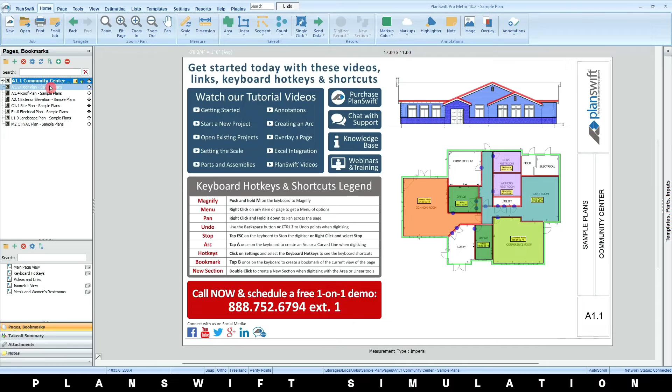In this video, we will be demonstrating the basics of PlanSwift, from creating a job, digitizing a takeoff, exporting takeoff data to Excel, and other basic tools and functions of this software. Let's begin. So this is the window that you'll see once you open PlanSwift version 10 or higher. As you can see, there are already sample plans that the developers have present for the users to experiment on. But for now, we'll neglect all of these.

Let us first explore the different parts or sections of PlanSwift. These options found on the topmost part are called tabs. The Home, Page, Tools and View tabs are different toolbars associated with plan viewing and takeoff. The Estimating tab is where you can view your takeoff summary in details. List, templates, and settings are where you can configure PlanSwift and set up reusable objects such as assemblies, lists, and others.

Reports. Well, that's pretty straightforward. You can run several built-in reports and export or print them. The Help tab provides you a wealth of resources for you to get started. And lastly, plugins allow you to add optional features and functionality to PlanSwift. Most of this video will only focus on the functions found in the Home tab. This set of functions or options located on top is called the ribbon bar menu.

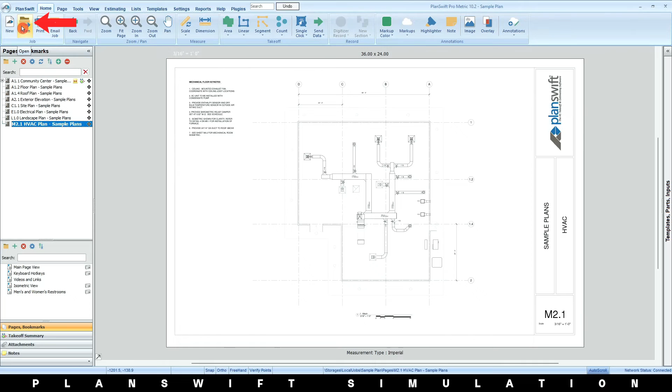Now, let's start digitizing. The Open button opens the Open Job window, which contains all of the existing jobs or takeoffs located on your device. There are 2 existing jobs here present by the PlanSwift developers. However, digitizing always starts with creating a new job. To do so, click on the New button to start a new job. Once clicked, the New Job window will appear.

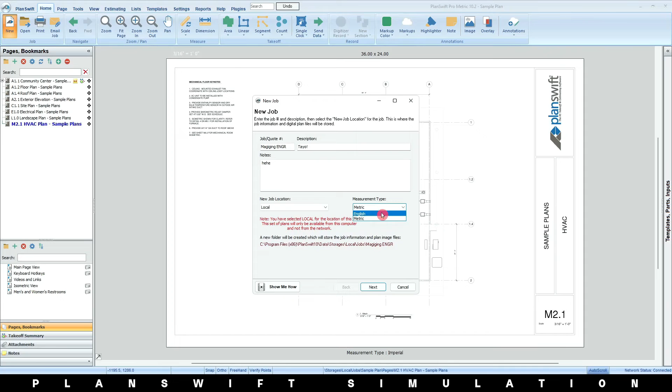This window allows us to name and describe the job, add any notes, and specify whether the measurements are to be in English or in metric. It's all a matter of preference with the names and descriptions. But for the measurements, we'll of course go with metric. Then click Next. This will now prompt us to browse and select the files we want to digitize. As you may recall from our presentation, PlanSwift supports all major digital file formats. Let me select the files that we digitized last semester in our quantity surveying course. Once the files are selected, click Next.

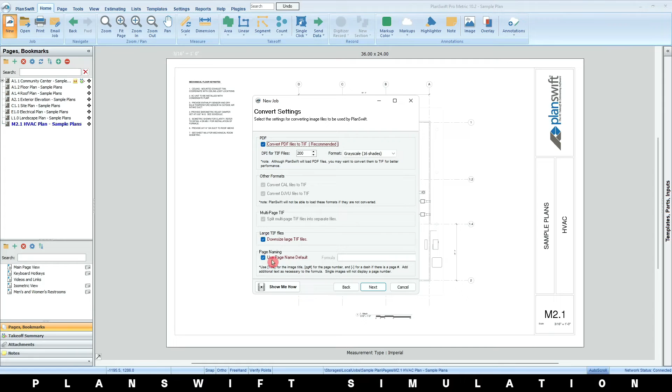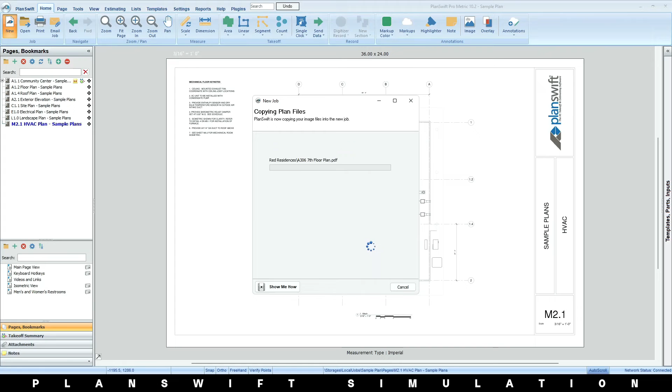If you miss selecting some files, don't worry, you can always add them later on. This window will pop up, allowing you to set up conversion settings or page naming needs if you have any. But for now, we'll just proceed and click Next. PlanSwift now tells us that we are now ready to create our new job. Click Finish. Now we wait for all the files to be imported. After the import is complete, the job is now created.

Notice that the plans I have imported are displayed incorrectly, as I have to rotate them 180 degrees. If you need to rotate your pages, first select the pages you want to rotate here in the left window. Then click on the Page tab and click on Batch Rotate Pages. Click Selected Pages, rotate 180 and click Start. Your pages are now rotated as per your preference.

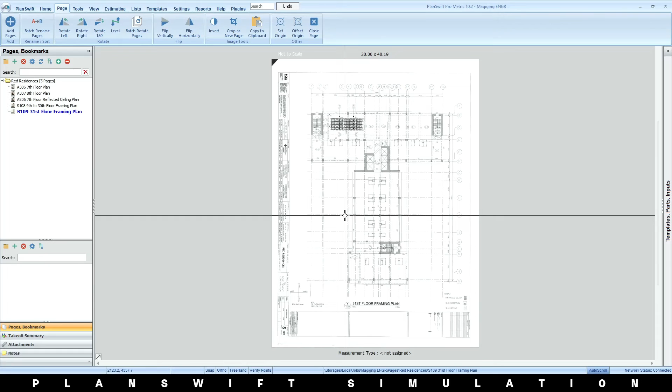Mr. Panganiban, please take the floor.

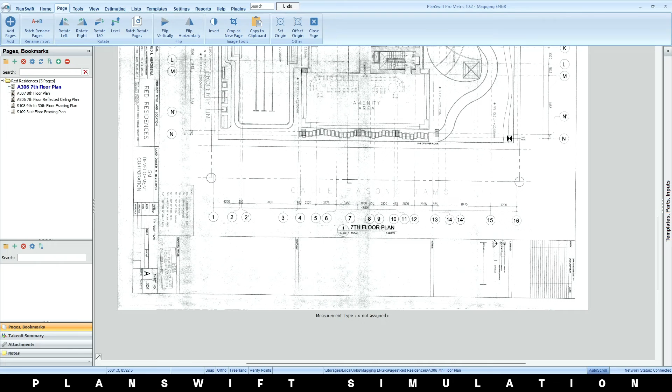Thank you, Ms. Peralta. So the next thing to do here is to scale the pages. If you may recall from our discussion, there are 2 types of scaling, manual and automatic. PlanSwift must know the correct scale for your plans, otherwise it will not allow you to start a takeoff. So most plans will come with a scale like this plan, which is 1:100 meters, and this is where the automatic scaling may come in handy.

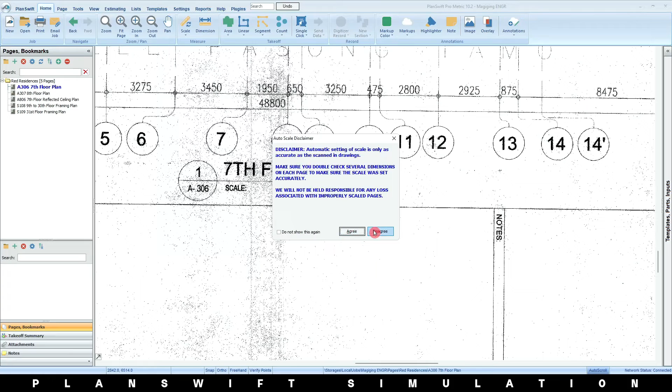So to automatically scale your plan, go to the Home tab, click on the drop-down half of the Scale button, and select from the list the scale that is indicated in your plan. So in this case, it is 1:100 meters. This window will then pop up asking for confirmation. If you click Agree, your plan will be automatically scaled according to what you have selected. However, I will click Disagree because I would rather use manual scaling, and I will explain why.

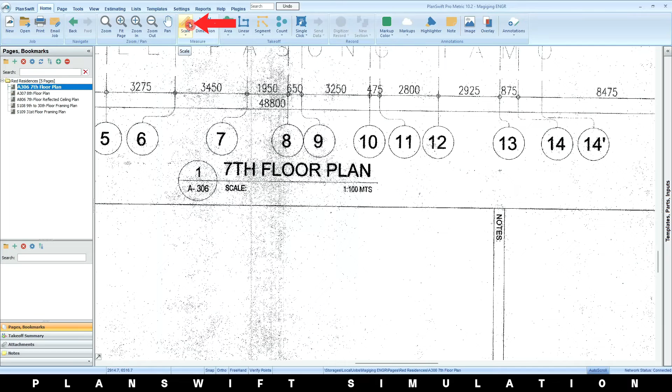It is recommended to use manual scaling for plans or files that are not directly exported from AutoCAD or any CAD software, like this plan that we have here on the screen, which is only a scanned copy of the original plans. To manually scale your plan, click on the Scale button, or you can also click on the drop-down half and select Standard. This window will pop up and you should input here a known dimension from the plan. It is recommended to input here the longest dimension.

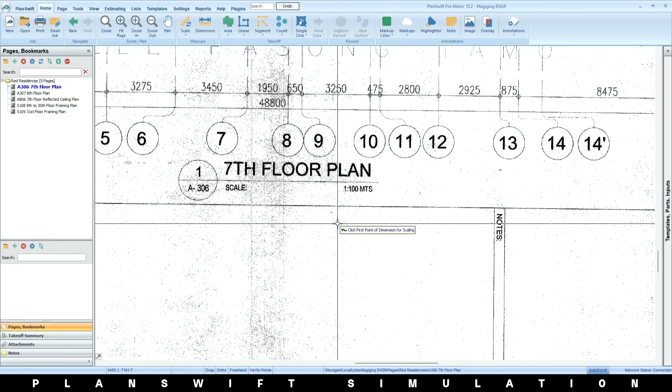In this case, I will input this 48,800 millimeters or 48.8 meters dimension. Click OK. Next, you should click 2 points on the plan that indicates the 48.8 meters. You can hold the M key on your keyboard to magnify the page, just like that, and you can hold on your middle mouse button to pan the page. So the 48.8 meters starts from this point all the way to this point. Now your plan is horizontally scaled.

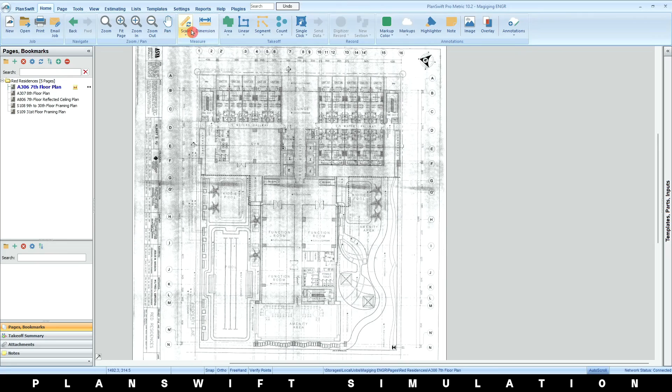Do the same thing to scale your plan vertically. So click on Scale, input the longest vertical dimension, which is 59.975, OK, and click on the 2 points that indicate the 59.975 dimension. Your plan is now vertically scaled. You'll know that your plan is horizontally and vertically scaled when you see this little plus icon with arrowhead beside the name of the page in the Pages Bookmarks window.

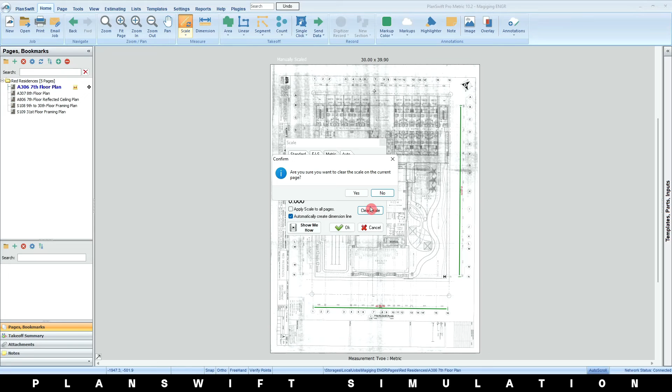If you make a mistake on your scale and you want to remove it, click on the Scale button, click Clear Scale, and click Yes. Next, you have to level the pages. The plans here I have on the screen are not leveled correctly because they are just scan copies of the original plans. If I try to draw a straight horizontal line here using the Dimension tool, you'll notice that it does not match the horizontal line on the plan, which means that the plan is slightly rotated.

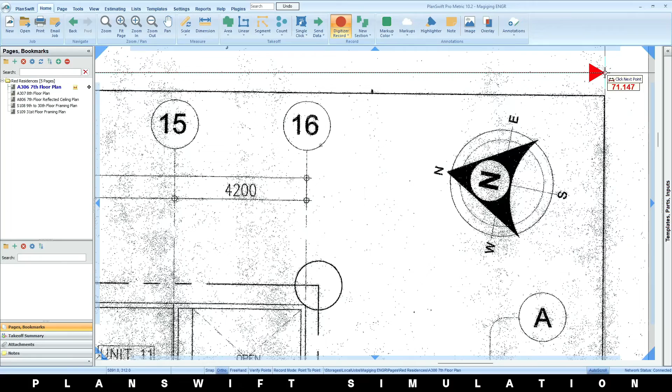By the way, I was able to make this straight horizontal line with the help of the Ortho tool. With the Ortho tool turned on, you can keep and snap lines straight at a 90-degree or 45-degree angle. To do this, press the Ortho button at the bottom of the main window or simply press F8 on your keyboard. You'll know that it is turned on when the background color of the Ortho button shifts to a darker one. Now back to page leveling.

So to level a page correctly, go to the Page tab, click on Level, then click on 2 points in the plan that are intended to be straight. The plan then automatically straightens out. I will now scale and level all the plans here for a moment. I cut the video in scaling and leveling the other pages. You can see these arrowheads here indicating that they are already scaled. Now that all the plans are scaled and leveled correctly, we are now ready to do our takeoff.

Mr. Katindoy, show them how it's done.

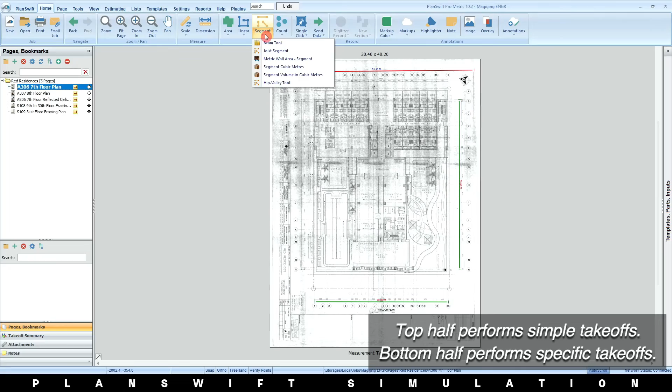Will do, Mr. Panganiban. So we have presented to you earlier the takeoff tools in PlanSwift, namely Area, Linear, Segment, and Count. These tools are located in the ribbon bar menu and they all work similarly. The top half of these buttons will perform simple takeoff, while the drop-down halves perform more specific takeoffs. Let's start with an area takeoff. Let's first take off the floor area of this bathroom right here.

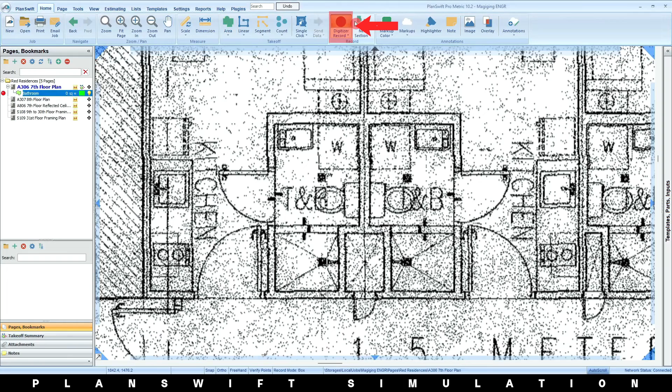Clicking on the area tool or pressing number 1 on your keyboard opens the Properties area window, where you give the takeoff a name and assign a color and fill type to it. So I will name this takeoff bathroom and pick a color and fill type that I want. After clicking OK, notice that the Digitizer record button on the ribbon bar menu turns on. It transitions from green to red, indicating that you can begin the takeoff. Before clicking anything on the plan, we suggest to verify first if you have your desired record mode found on the bottom of the main window.

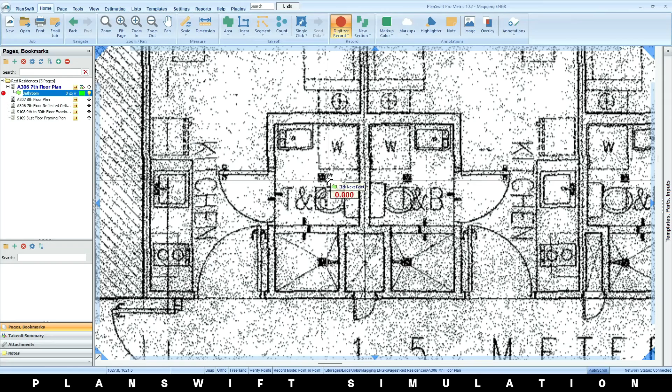There are two types of mode as presented in our discussion, the box mode and the point-to-point mode. I will show you the difference between the two, starting with the point-to-point mode. The point-to-point mode prompts you to select the corners of the area that you want to take off. This bathroom has 6 corners. To take off this bathroom, I will now click on the corners one by one in a clockwise or counterclockwise manner. Don't forget to press M to magnify the page for more accuracy. Take note that if you are holding M, it is better to use the right button of your mouse to pan the page instead of the middle scroll button.

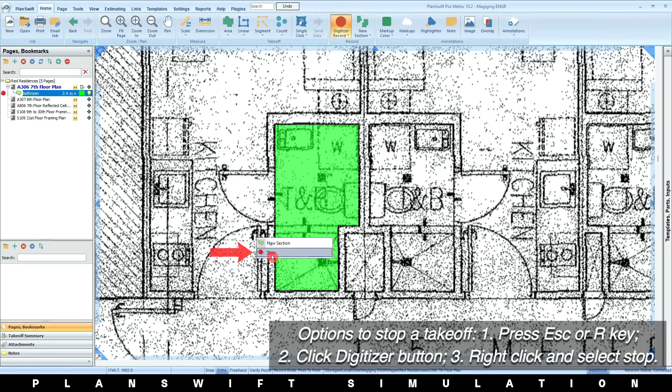Once you have selected the last corner of the area, you can either stop the takeoff or take off another area. To stop a takeoff, you have 3 options. 1. You can simply press the Escape or R button on your keyboard. 2. You can click the Digitizer record found on the ribbon bar menu. And 3. You can right-click on your mouse and select Stop. I will now stop the takeoff using option 3. For the box mode, let me show it to you through the takeoff of this balcony.

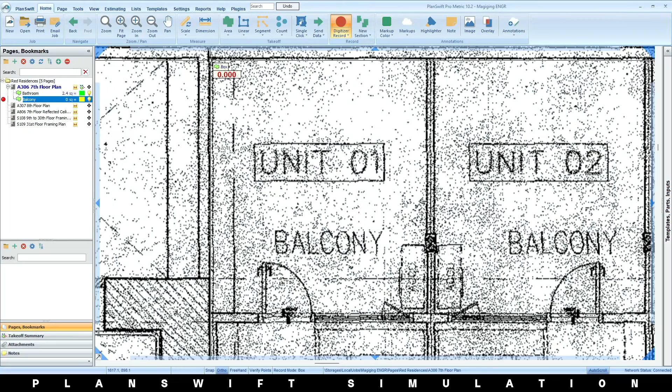So once again, click Area. I'll name it Balcony. OK. Click the record mode to switch from point to box mode. The box mode is very simple: you just have to click 2 points to form a box in order to take off an area. Take note that the box mode is only useful for square or rectangular areas.

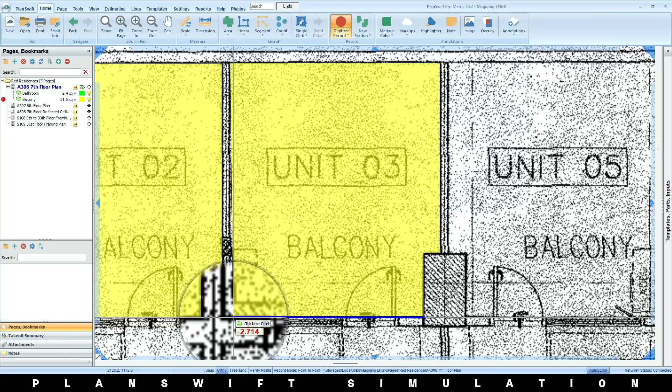Stop the takeoff after you've covered the areas you want to digitize. Remember that the point-to-point mode is better to use than the box mode if you are going to digitize an area with the shape of a polygon that is not square or rectangular.

The Pages bookmarks window found on the left side shows the completed area takeoff name, takeoff value, and fill color. Clicking on the yellow light bulb hides the takeoff on the plan and redisplays it when you click again to toggle it back to yellow.

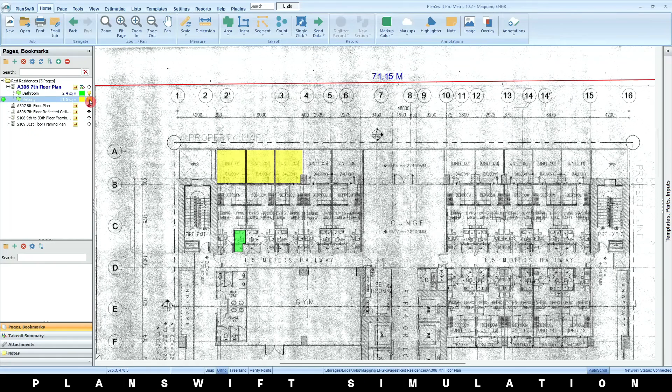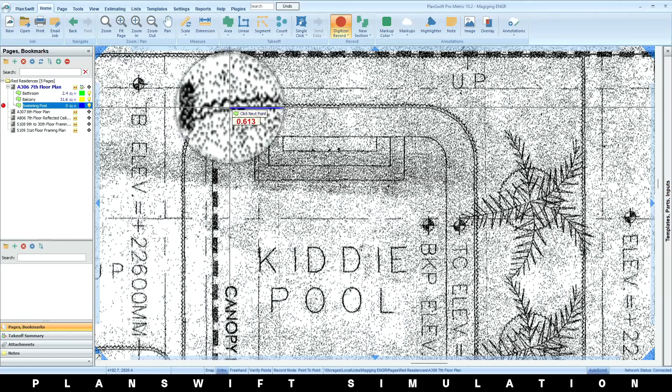In cases of arcs or curves, you can create an arc by simply pressing A on your keyboard during a takeoff. For example, I will digitize the swimming pool area here. So area, name it swimming pool, okay. When I'm already digitizing, I will click or stop on the point where it starts to curve. I then press A on the keyboard and click to the point where the curve stops.

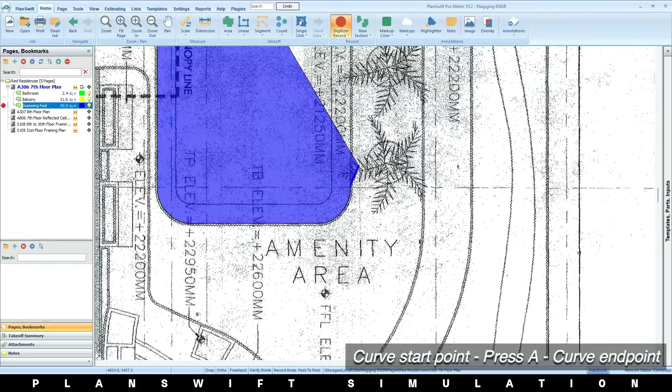And you have to adjust it and find the correct curve with your mouse, just like that. I will continue to do this on the other part. So, starting point of the curve, press A, and end point of the curve. That's how you take off a curve or an arc.

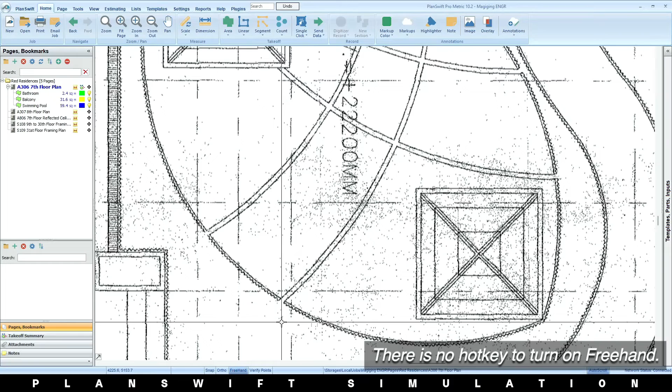In cases of irregular and non-polygonal shapes like this landscape figure here, you can digitize it using the freehand tool. The freehand tool allows you to take off as if you are holding a pen in your hand. Turn on the freehand tool by clicking on it on the bottom of the main window. Click area, set a name, let's say landscape, okay.

Position your cursor on the first point. Click and hold the left mouse button until freehand is shown in the floating box next to your cursor. You can now digitize with freehand until you release your hold on your mouse. If you make a mistake, release your hold and press backspace on your keyboard to undo the mistake.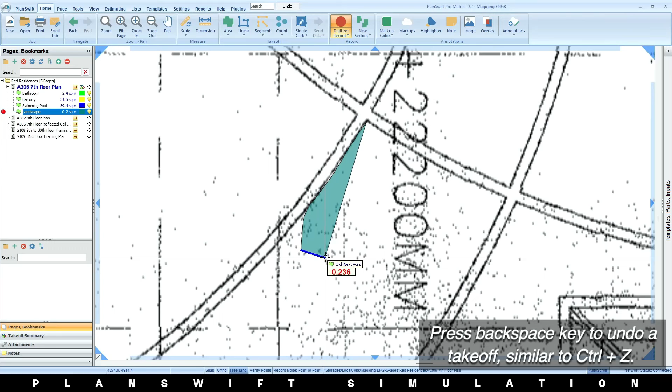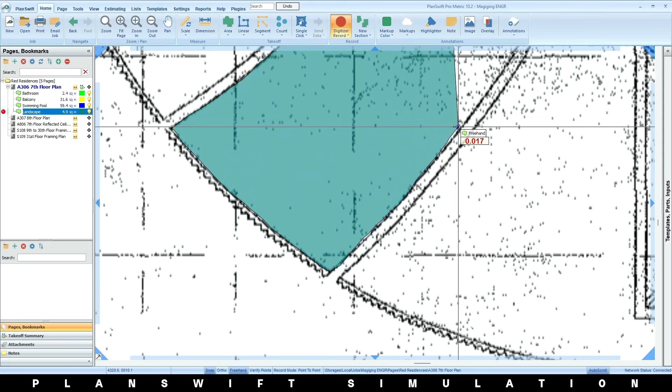Turn on snap for your cursor to snap to the last point so that you may continue digitizing there. To turn on snap, click on the snap button located at the bottom of the main window, or simply press F3 on your keyboard. To clarify, the snap tools allow you to snap at any known point in your takeoff. It is not limited to freehand takeoff. And that's how you take off using the area tool.

Ms. Taguba, you may now take the wheel.

Roger that, Mr. Katindoy. So guys, let's try the linear takeoff. Performing a linear takeoff is similar to performing an area takeoff. Linear takeoff uses a line to take off continuous items such as fencing, piping, electrical runs, cove lights, wall areas, and others. Let's try to take off the cove lights on this reflected ceiling plan.

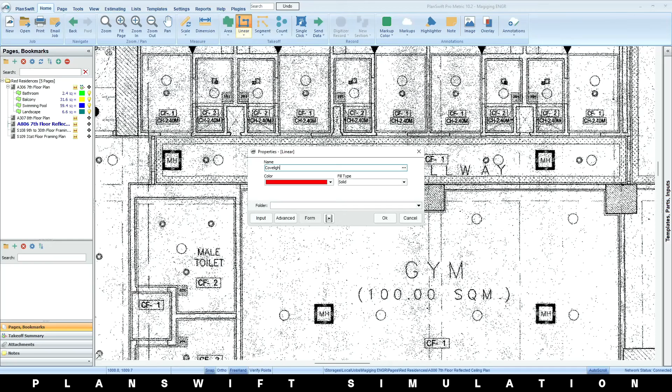Clicking on the linear tool or pressing the number 2 on your keyboard opens the Properties Linear window that is similar to the Properties Area window. Set a name, cove lights, and click OK. Position your crosshair to the first point of your takeoff and continue to digitize to the other corners or points. If you notice, this is just like the line command in AutoCAD.

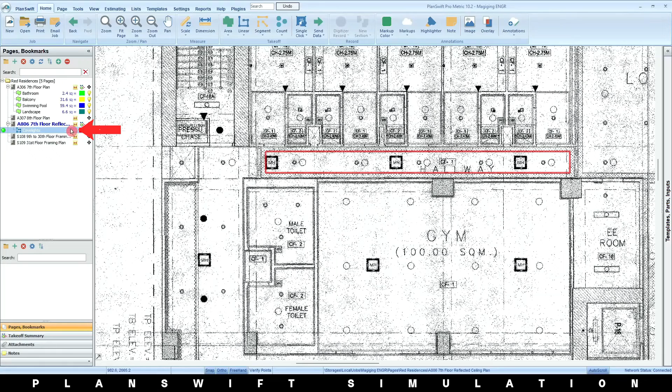Once you think you're done, stop the takeoff. The total length of the cove lights you digitized is now displayed on the left window. Similar to the area tool, you can also choose between point-to-point and box mode. You can also perform linear arcs and linear freehand, in which the mechanics are the same as the area tool presented a while ago.

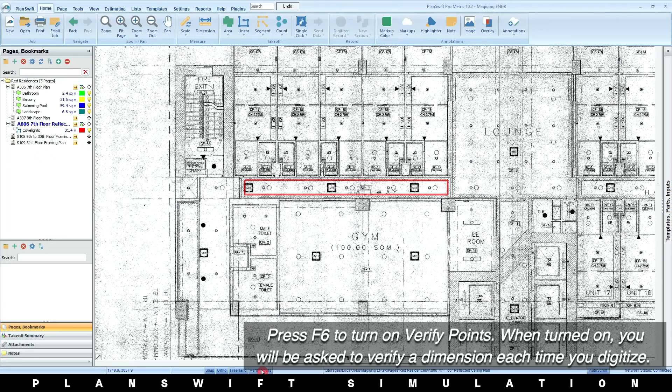Now, before we proceed with the segment takeoff, let's talk about the Verify Points tool. The Verify Points tool prompts us to verify the dimensions of a line each time we perform a takeoff. Let me show you how it works. First, turn on the Verify Points at the bottom of the main window, or simply press F6 on your keyboard. If the freehand tool is turned on, Verify Points will not work, so make sure freehand is turned off.

Let me take off the outer wall of this building. So linear, I will name it exterior wall. Okay, with the Verify Points turned on, each time you digitize a section, this window will appear, called the Verify Entry window. This window shows you the dimension of the section that you just digitized and allows you to change that value.

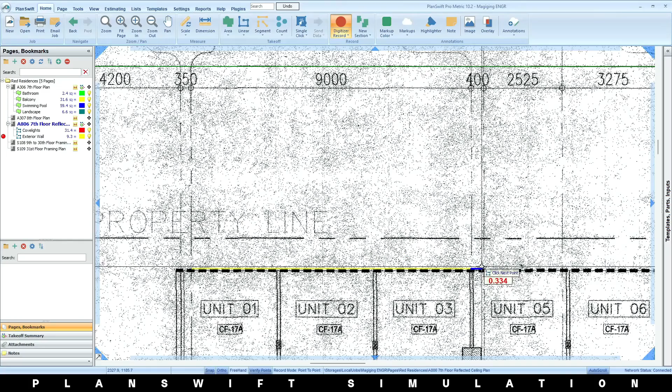So for this line, it tells me that it is 9.3 meters horizontally and 0 meters vertically. However, I know that this line is 9 meters according to the plan. Verify Points gives me the power to change it for it to be accurate. I will change it now to 9 meters and the line will automatically adjust according to what value I have inputted. However, there's a downside of this tool.

This is accurate for only whole numbers in the metric system. This is because this second value here is erroneous as it corresponds to the inch unit of the English system, wherein if we input half a foot or 6 inches, it will reflect to a half meter or 0.5 meter on the plan. On the other side, when you are using the English system, the Verify Points tool is impeccable.

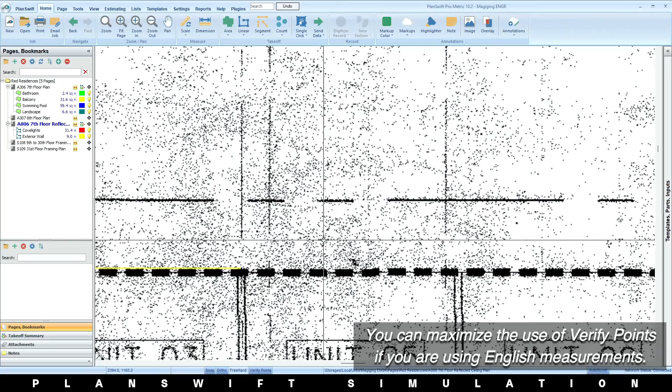Let's now proceed with the segment takeoff. Segment takeoff is almost the same as the linear takeoff. Their difference is that in segment takeoff, whenever you are finished clicking on two endpoints of a line, it allows you to take off a separate line. Let me show you how it works. Let's take off the area of these bedroom walls.

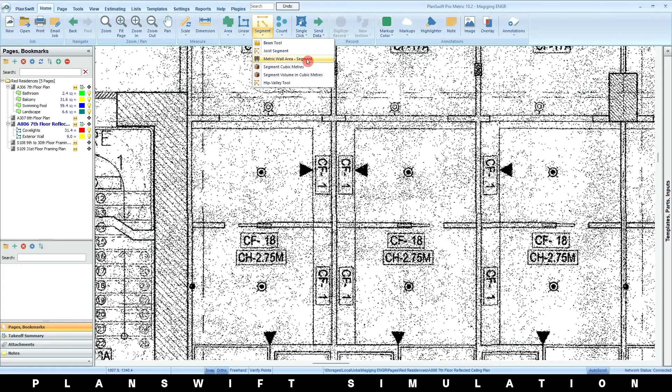Since we're going to take off the area of a wall and not only its length, we're going to use the metric wall area segment. You can also do this in the linear tool, except that your lines will be continuous. Click on the drop-down half of the segment button and select metric wall area segment. This window will then pop up.

In the General tab, you will input a name, the height and the width of the wall, and the number of wall sides. In the Appearance tab, you will select a color and fill type. So, bedroom walls. Let's assume the height to be 3 meters and the width to be 100 millimeters. The number of wall sides will of course be 2.

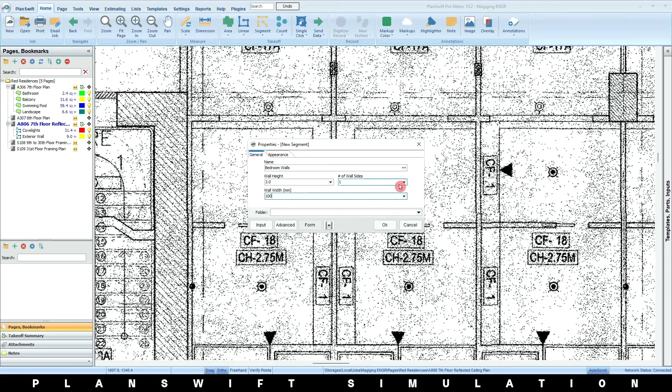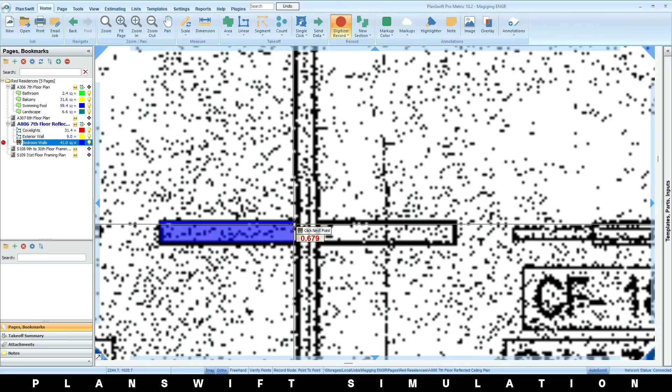Click OK. For wall areas, if you are digitizing a horizontal line, position your cursor on the top left of the wall. For vertical lines, position it on the top right. So here, I will position my cursor on the top left and continue to digitize the other walls. Notice that unlike in the linear tool, the segment tool automatically lets you digitize a separate line once you finish clicking on 2 points. Once you're finished, stop the takeoff. You can now see on the left window the total area of the walls that you digitized.

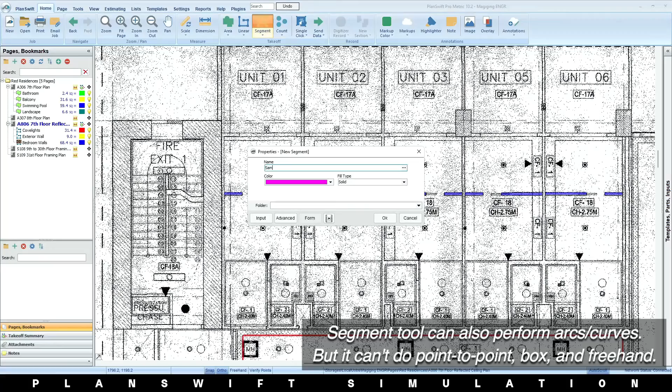Similar to the area and linear tool, you can also perform arcs in the segment tool with the same mechanics. However, the freehand tool will not work with this tool, as well as choosing between point-to-point and box mode. Now, Ms. Peralta will demonstrate the last takeoff tool.

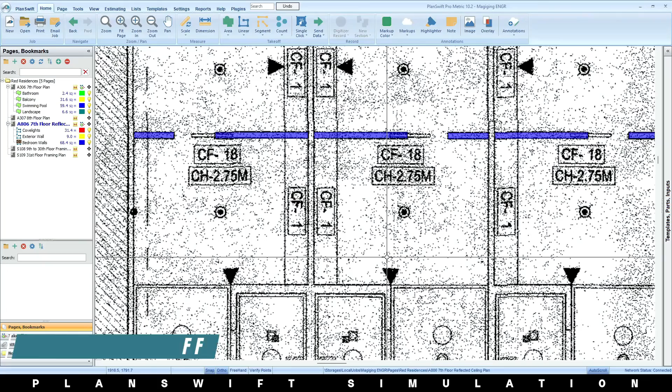Finally, the last takeoff tool, the count tool. From the word itself, the count tool simply counts items in your plan such as doors, vents, manholes, trees, and many others. Let's count the manholes in this plan. Click on the count button or simply press the number 4 on your keyboard. This properties window will pop up.

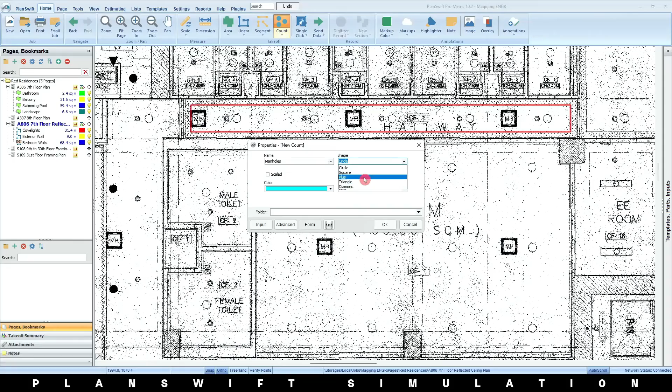Label it as manholes, and you can choose what shape you like that you will show on your plan once you count the items. You can choose among circle, square, diamond, plus sign, and triangle. I want to use a square to match the shape of the manholes. Click OK. Then all you have to do is to click on the items that you want to count on the plan. So I will click on all of the manholes on this plan. Once you're done, stop the takeoff. Very easy. You can now see in the left window the number of manholes present in the plan.

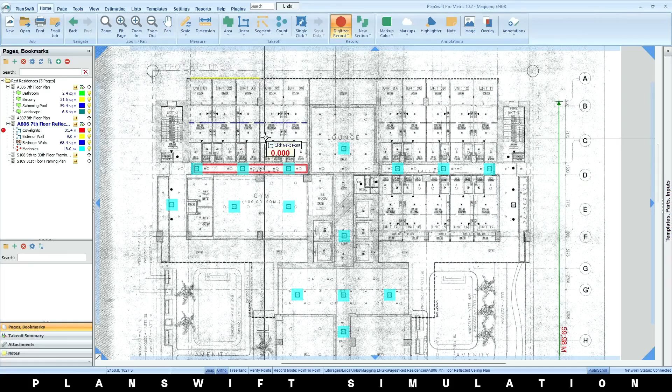If you want to add another section to the area, linear, segment, or count that you already digitized, simply press the green button that appears on the left of the takeoff item and proceed to digitize. Or you can select the takeoff on the plan, click on New Section on the ribbon bar menu and proceed to digitize. Whenever you're adding a new value to an item, the total value of that item displayed on the left window will automatically update.

If you have similar areas on your plan, just like these bathrooms, you can simply copy an existing digitized area and paste it on the identical area. To do this, select the digitized area. Right-click, copy. Then position your cursor on the top left part of the identical area. Right-click and paste. That's how you add sections to your takeoff on the same pages.

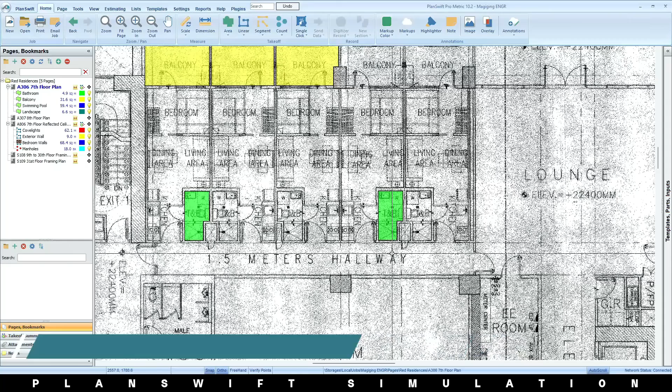But how about on the other pages? If you want to add another section to your takeoff that you already digitized, but that section is located on a different page, you can do it just as well.

Let's just say that I want to take off the floor area on this balcony in the 8th floor, but I want it to be the same item as the balcony in the 7th floor. The first step is to make sure that you are on the page where you want to take off, hence, in this case, the 8th floor. Then, hover on the takeoff item on the left window where you want your new takeoff to be added. In this case, the balcony. Click on the green button on its left side, and then perform the takeoff.

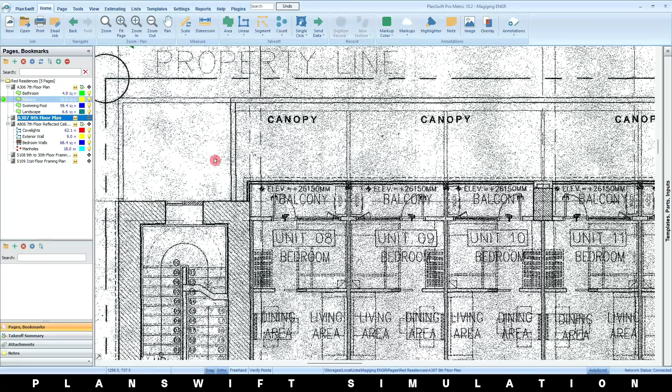PlanSwift adds up the values of all new sections, even when they're on different pages. The grand total on these values is located in the sidebar takeoff summary area. If you want to save a specific view on Plan and you want to easily get back to it later at some time, you can do it with the bookmark tool.

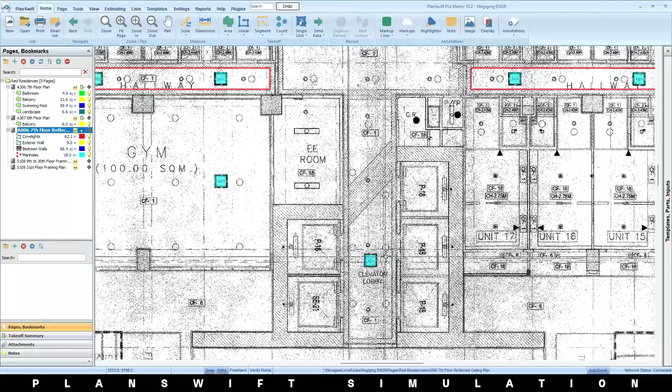Let's say I want to save the view here on the elevator lobby. I will first position my current view on it, and then I can simply click on this plus sign in the bookmarks window or press B on my keyboard. Once done, this window will appear, and I will of course name it 7th floor elevator lobby. This current view has now been bookmarked and is listed in the left window called the bookmark window.

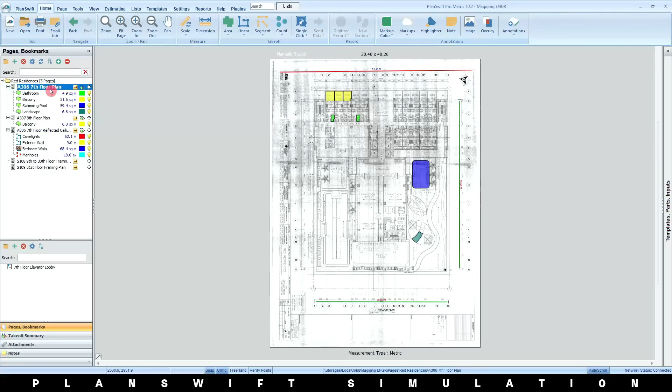If I go to a random page and I want to get back to the 7th floor elevator lobby immediately, I can simply click on the bookmark that I made and the view will automatically show up on my screen. In PlanSwift, you can add as many bookmarks as you want.

Back to you, Jemima. Thanks, Kat.

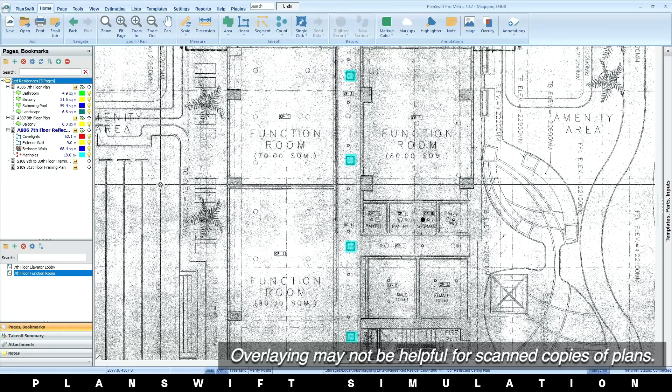This time, I'm gonna teach you guys how to overlay. If you want to compare pages imported on your project or job, you can do it with the overlay tool. Take note that the overlay may not be that helpful if you are comparing pages that are just scanned copies. So, for this demonstration, I will use the water distribution plans from our engineering utilities course.

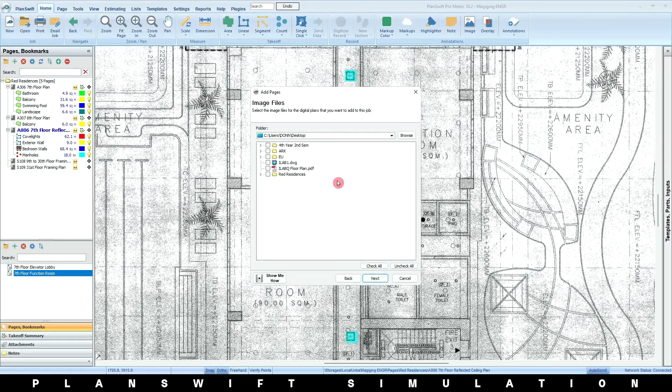By the way, this is how you add new pages to your job. Click on this plus sign, select from image files, click next, and then browse and select your files, click next, next, finish. You have now imported new pages.

Let's say that I want to overlay this 3rd floor water distribution plan over the 2nd floor water distribution plan. To do this, make sure first that both pages are scaled and leveled. I already scaled and leveled them. I just cut the video. Next, go to the page where you want to put an overlay. In my case, it's the 2nd floor plan.

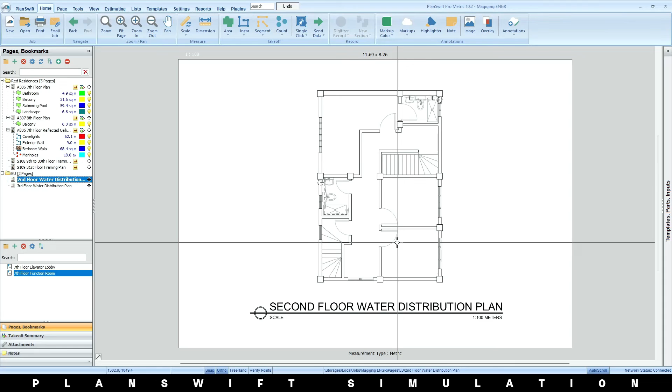Then, click the overlay button on the top right ribbon bar menu and choose what type of overlay you would like to perform. Let's go first with the standard overlay. Click next. You can name the page you want to overlay, also known as the overlay page, and set its color. Select the overlay page from the list. So, my overlay page would be the 3rd floor water distribution plan.

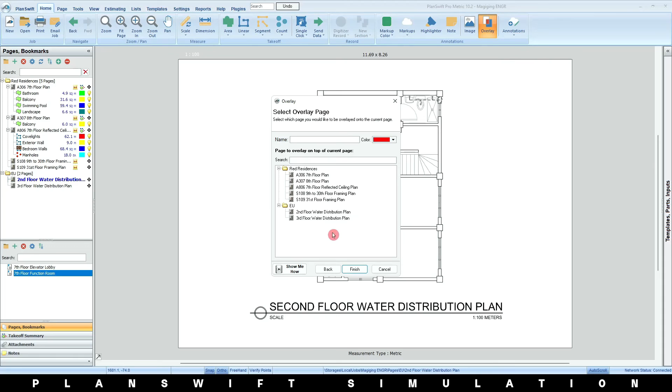Click Finish. This window will pop up asking you if you would like to align the overlay. I'm gonna go click No since they are already aligned. And as you can see, the 3rd floor plan is now overlaid on the 2nd floor plan, but it is in red color and is somewhat transparent. You can now compare the two pages and you can also do takeoff.

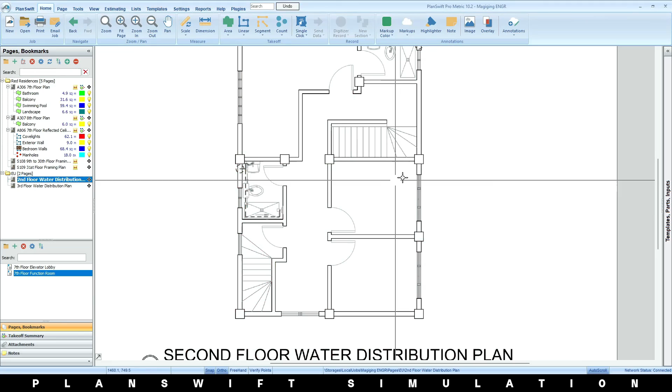If you want a more detailed comparison of the pages, use the comparative overlay. Repeat the same process but now selecting the comparative overlay once you click the overlay button. In comparative overlay, the additions and deletions are shown. Additions are shown in red color while deletions are shown in blue color.

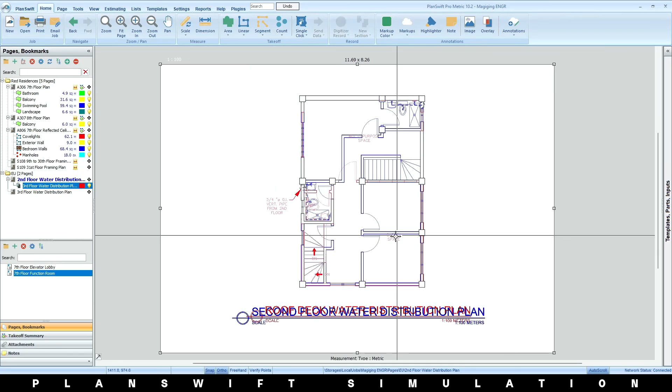This wall, for example, is in blue color, meaning it is absent in the overlay page but is present in the current page. Sections that are present in the current page but are absent on the overlay page are called deletions and are blue in color. On the other hand, sections that are present in the overlay page but are absent in the current page are called additions and are in red color.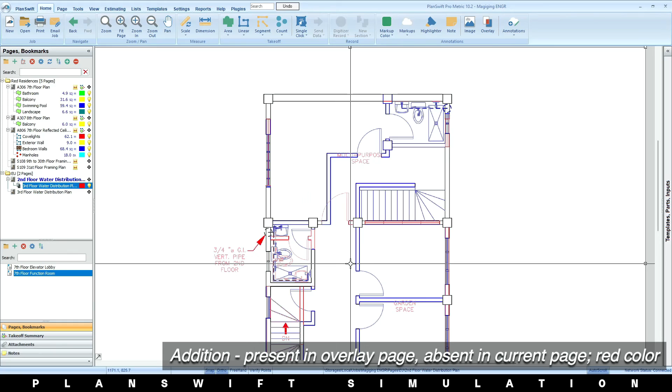John Riz has more to share with you. I do have more to share, Jemima.

Adding markups, highlighters, and notes in your plans can be useful if you are working with a team. To add a markup, click on the drop-down half of the markup button on the ribbon bar menu and select whether your markup will be in a form of an arrow, a box, a line, or even a highlighter.

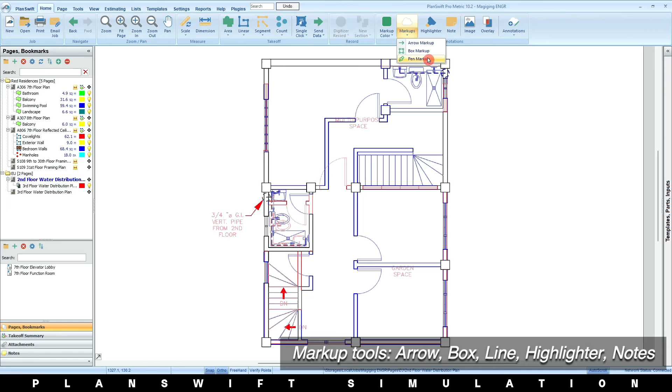The arrow and line markups are similar to the linear takeoff tool, plus the freehand tool works on them as well. The box and highlighter is similar to the box mode when using an area or linear takeoff. You can change the color of the markup by clicking the markup color. You can also add notes in your plans, which has a similar mechanic to adding a text in AutoCAD, but with a transparent colored background.

If you have markups on your plans, you can hide them by going to the View tab and clicking on Hide Markups. You can also hide labels, takeoff items, overlays, dimensions, notes, and cut lines in your plans.

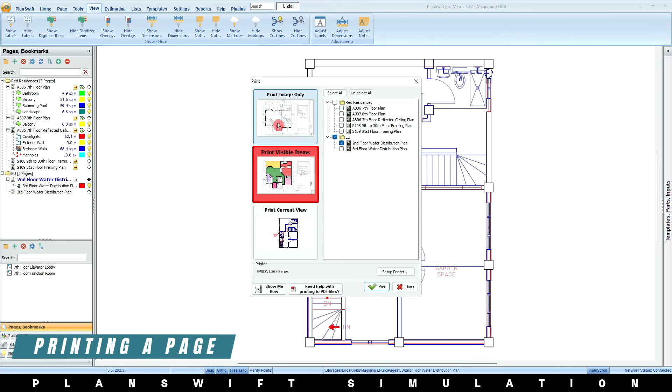Clicking on the PlanSwift logo allows you to specify pages that you want to print by clicking on Print. Select the pages you want to print, then select if you want to print image only, print visible items, or print current view. That is all for me.

Your turn, Mr. Panganiban. Thank you, JD.

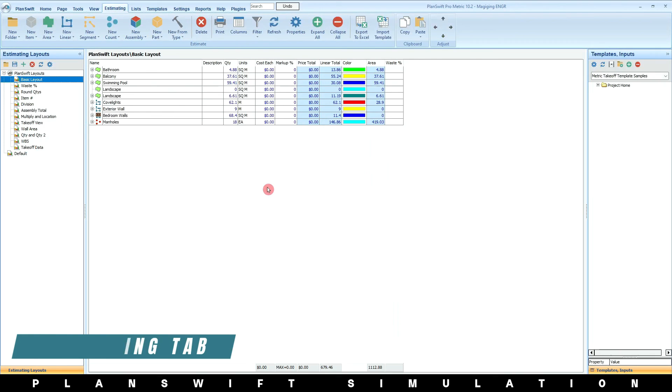If you want to view the full details of your takeoff summary, go to the Estimating tab. The Estimating tab provides a summary of all of your takeoffs in the current job. The takeoffs are displayed in a grid, which is called a layout. Layouts can be modified by adding or removing columns, or by deleting a takeoff, which removes a row.

By clicking on the Columns button on the ribbon bar menu, you can see that PlanSwift already has these pre-made descriptions of columns that you might want to display or hide in your summary. All you have to do is tick or untick them. Takeoff totals appear at the bottom of the layout. Layouts may be filtered in sections, can be printed, and can be exported to Excel.

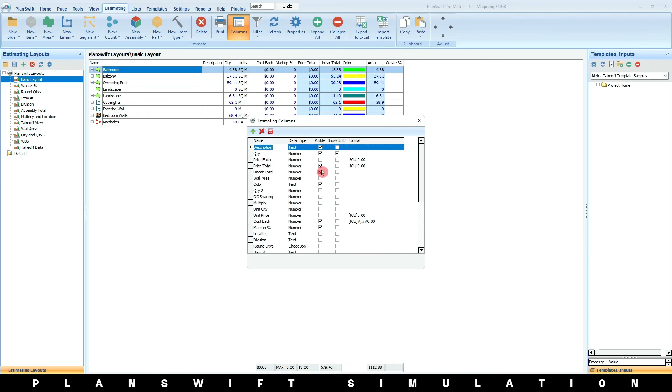Before we export this data to Excel, let me first tidy it up. For me, these are just the data that I need to export in my Excel worksheet. So to export your data to Excel, click on the Export to Excel button, and once clicked, PlanSwift automatically exports all the displayed data on the layout to an Excel spreadsheet, even if Excel isn't open yet. I can now save this file and enjoy the rest of my day because PlanSwift has helped me save so much time with its takeoff tools.

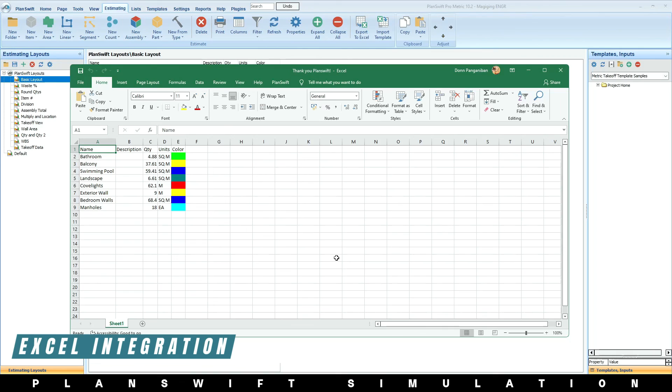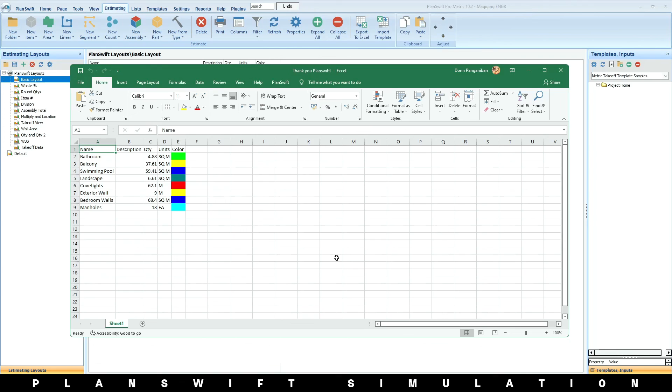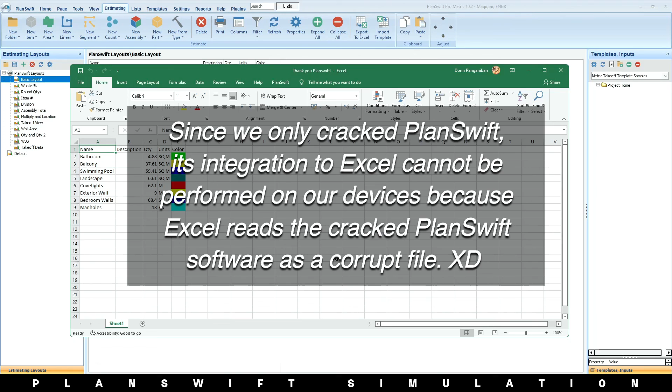Let's talk about PlanSwift's integration to Microsoft Excel. As we have presented, PlanSwift's integration with Excel provides the ability to live link and update Excel workbooks in real time. Take note that integrating PlanSwift with Excel is not the same as exporting data from PlanSwift to Excel. Unfortunately, since we only cracked PlanSwift, its integration to Excel cannot be performed on our devices because Excel reads the cracked PlanSwift as a corrupt file and it displays this error message whenever we try to do the integration. Therefore, the next video is a recycled one from YouTube.

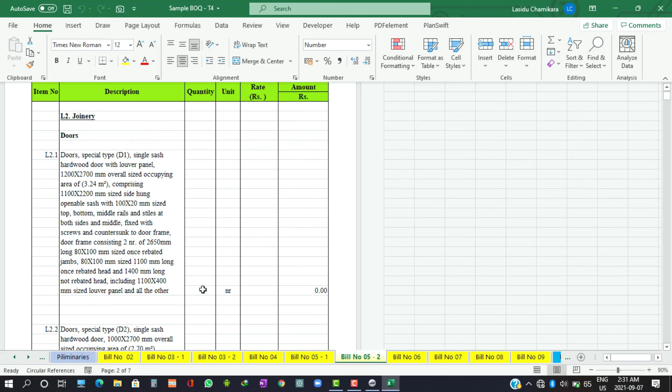So to integrate PlanSwift with Excel, first open the job in PlanSwift you want to link to an Excel worksheet. Then open Microsoft Excel. On the Microsoft Excel ribbon, click on the PlanSwift ribbon bar tab. By the way, this tab is automatically integrated in Excel once you have installed PlanSwift on your device. Let's say you have a bill of quantities worksheet like this, and you want your data on PlanSwift to be automatically inputted in Excel once you digitize them.

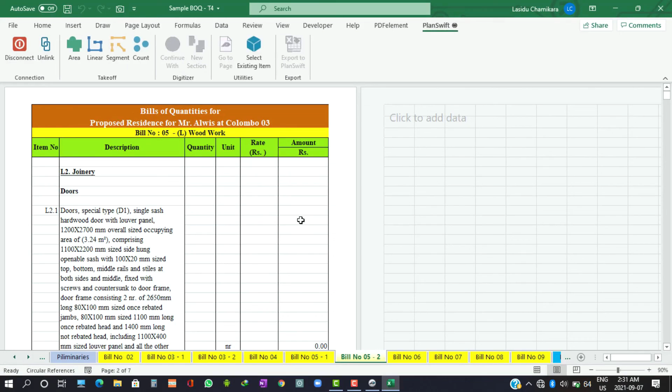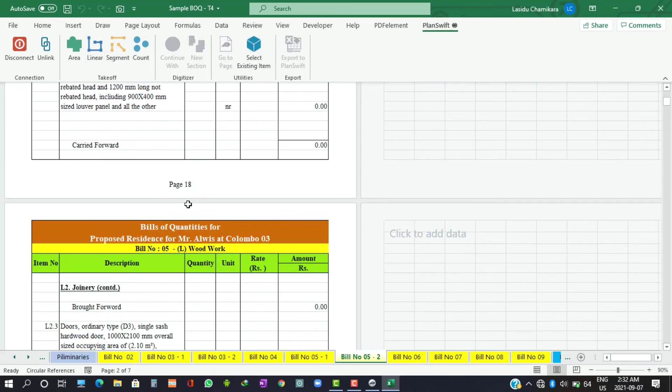Click the Connect button on the upper left, which then transitions to a red Disconnect button. Takeoffs can now be initiated using the area, linear, segment, and count tools in Excel. So let's try to take off the number of doors, labeled as D3, using the count tool. First, click on the cell where you want your data to be inputted. Then click on the count tool. PlanSwift automatically pops up on your screen and displays the properties count window. So name it and press OK. You may now proceed to do your takeoff.

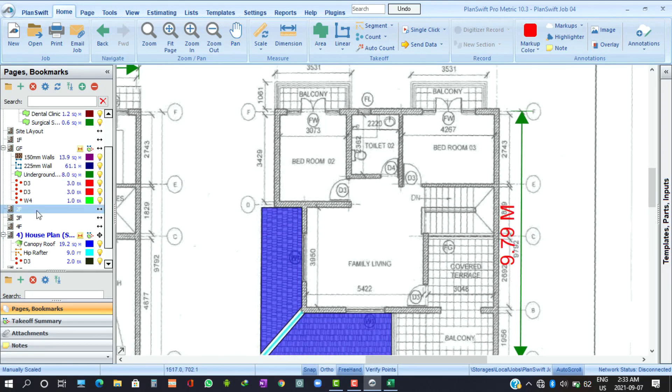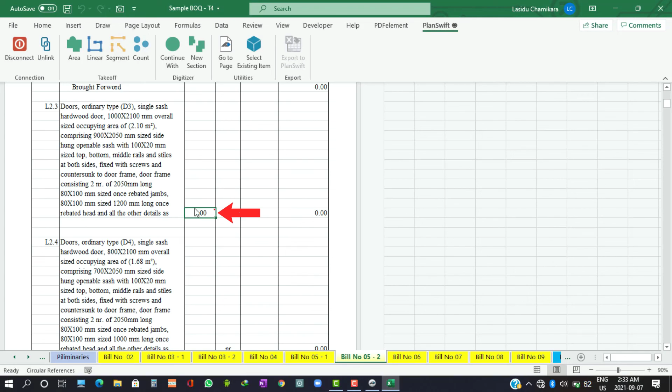Once you're done, stop the takeoff. And if you go back to your Excel worksheet, you can see that the data from your PlanSwift takeoff is automatically inputted in Excel. If you want to add to that takeoff, click on the green button beside that takeoff item in PlanSwift and proceed to digitize again. Once you stop, the value in Excel will also update. It now has a total of 5 doors counted, which was previously 2. You can also do this in area, linear, and segment takeoff.

So that is all, guys, for the simulation of PlanSwift. Imagine the time we could have saved if we knew all of this during the takeoff requirements in our quantity surveying course. Nevertheless, thank you for listening and we hope we helped you learn something.